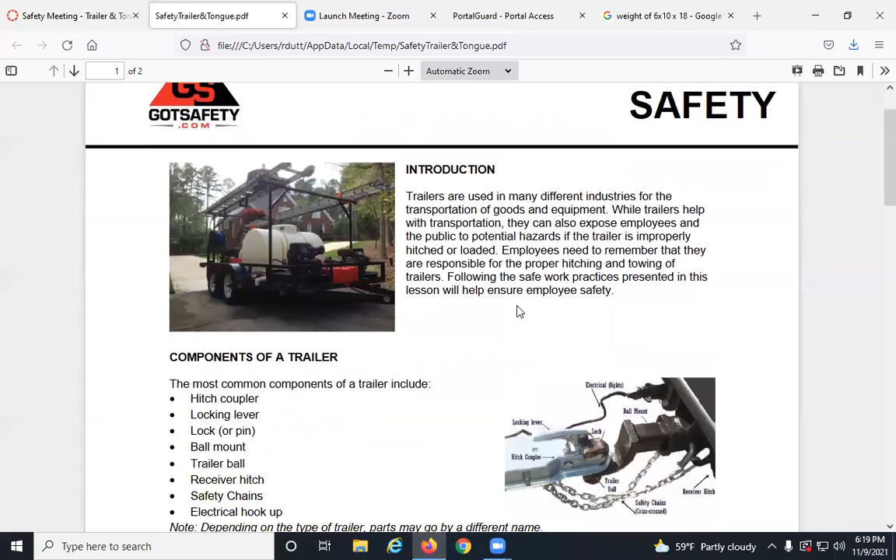Okay, we are not going to read this. It goes through the components of the trailer, plus I'm not projecting it for you guys. Have you started recording? I did, thank you. So I'm not going to project it, so you guys don't get to see it. You'll just need to access it on Canvas if there's a question from here and you want to look for that answer. We're just not going to take the time to do it. It's a good safety meeting because we do use trailers and I actually like it, I just don't want to take the time right now. So it's still sitting there for you.

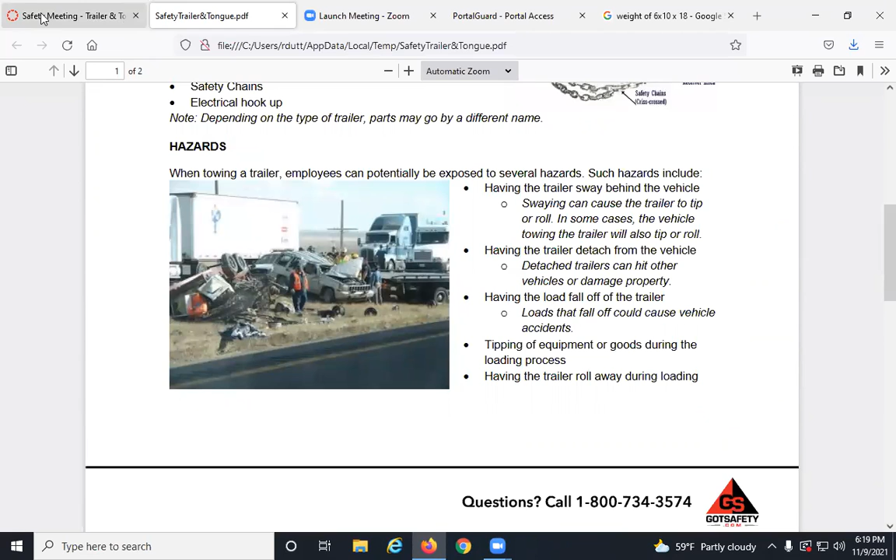But I'm not doing it tonight, bless you.

So week 12, this is week 12. What does that mean? Well, it means 4 more weeks, and then I imagine we'll do the final on the last night. So really 3 classes left. The final's gonna be in week 16 for this class, or week 15?

16, the last class. I know Patrick does his in week 15. Well, I used to do that too, even though the school tells you in no uncertain terms when you need to do your final. We were doing it before so people could come on that last class, get their test back, and we could go over the test. But what happened over the years is that half the class didn't show up for the last class. They did their final, they were done, they didn't feel like they needed to show. I couldn't get them to show, so we started having it on the last day, so people had to show and take the final.

So midterm exam review. Where did I put the exam in here? No, all right, good, it's 100 questions. Yeah, he didn't put this double, so this should be 7 sheets.

6, 7 sheets. There's a bunch of true and false questions. Everything's based on the book, except the stuff we did up at City College, the pour and the forming.

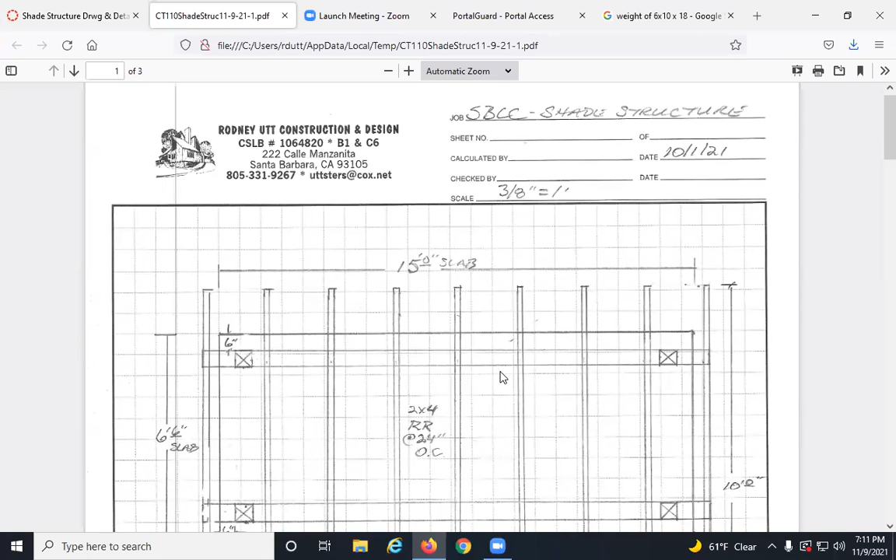Okay, so here's what we've been doing. It hasn't changed a whole lot from my first drawing, but I just want to show you how we're going to change this and all the figuring I did today. Right now this slab is 15 feet, right on 15 feet. The posts are 6 inches in, right? So I show this beam at 6 inches past on both sides, and that's using a 16-foot beam.

We have an 18-foot beam. We're going to square it up, probably take 6, 8 inches off. We'll make them both exactly the same, hang them both over exactly the same. So for instance, let's just say we wind up getting 17.6 - we get both our beams cut to 17.6. They'll still sit exactly where they're sitting. The rafters, the 9 rafters, will still sit right there, because that's going to carry our roof.

Our beam will cantilever a little further. Because right now at 16 feet, it cantilevers a foot past, right? 6 inches and then 6 inches past the slab. That's at 16 feet. If we go 17.6, we're going to be past the slab - we're going to be 16... we're going to be 1.5... we're going to be 9 inches past.

Is that it? No, that's not right. So at 17.6, from 16, that's 1.5 feet. Yeah, so from 16, rather than 6, it'll be 2 feet past. But regardless, all you need to know is that whatever we come up with for those beam dimensions, it will be exactly the same length.

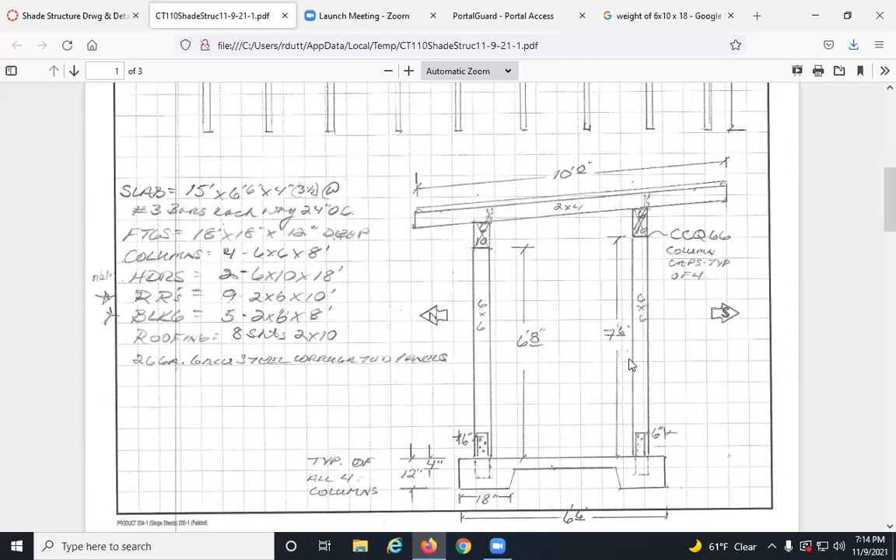So to work out those bird's mouths - at this point I had this going, I changed it once from 6/8 to 7/6, which would be 10 inches of rise, and that 5-footer run would have given me a 2 and 12 pitch. But as it turned out, I decided to do a 2 and 12 pitch using 10 inches.

Well, I was thinking about 6 feet - it's not 6 feet, it's actually 5 feet. It's 5 feet, and 5 feet is basically from here to here. So I called that our run from outside to inside at 5 feet, and we gain 2 and 12. So in a 5-foot run and a 2 and 12 pitch, we're going to rise how many inches?

Yeah, 10. 5 times 2, 10. So it's going to be a 10 inch rise. So ergo, this post will be cut at...

6/8. That's the post. 9.5 inch header set on top of it, making it 7 foot 5.5. This post will be cut at 8 3.5. That should be a line continuing there and a cross hatch. That's 8 3.5, that's the length of the post. And then add 9.5 inches to that, you come up with 7/6.

Right? Is that true? No. What have I done? I screwed something up in that, didn't I? No, that's right. So this post is cut 6/8, this post is cut 7/6. That's what it is, 6/8 for one post, 7/6 for the other.

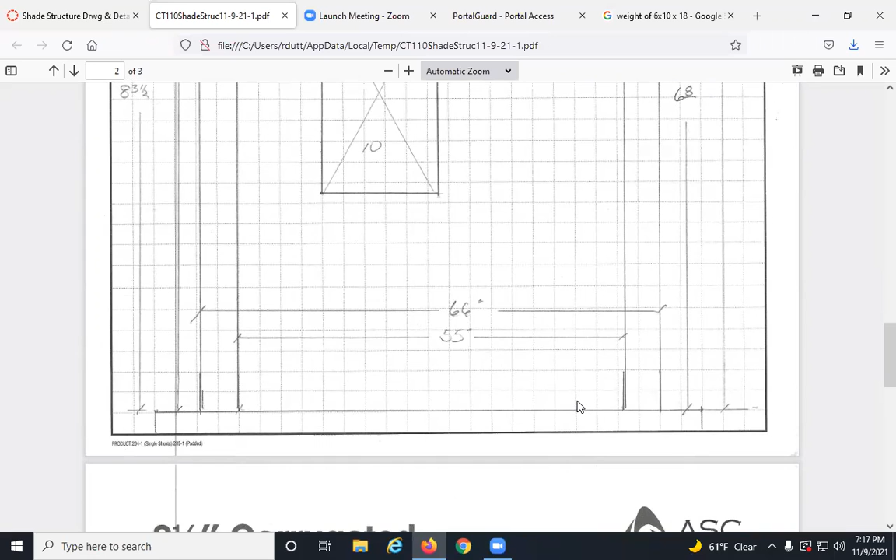I laid this out to scale, pretty big scale, 1 inch scale. That's as big as I could get on that page. Showed the slab, showed exactly where these column bases are based on the measurements I took on the slab, not just my drawing. I went and measured the actual slab. So that's all laid out.

That 66 and 55 are per scale. So I laid it out big enough where I could figure what I wanted for a bird's mouth, which was 1.5 inches down and 8 3/4 over on the flat, should give us the bird's mouth we need.

And this part of our bird's mouth, we'll cut a test piece, 2 of them on a piece of waste stock. Make sure it fits in there like we want it to, nice and makes contact all over it, 1.5 inches down and 8 3/4 across. And our post will be plumb.

And then from there, we'll lay out, we'll cut them all. There's only 9 rafters to be cut on the site, so I'm not too worried about that.

One thing I think I mentioned here, I'm not sure, I mentioned it more than once to more than one person: a 6'6" by 15-foot slab. 4 columns, 6 inches in all the way around, 2 headers, 9 rafters, 8 pieces of roof, 4 column caps, 4 column bases, steel and foam.

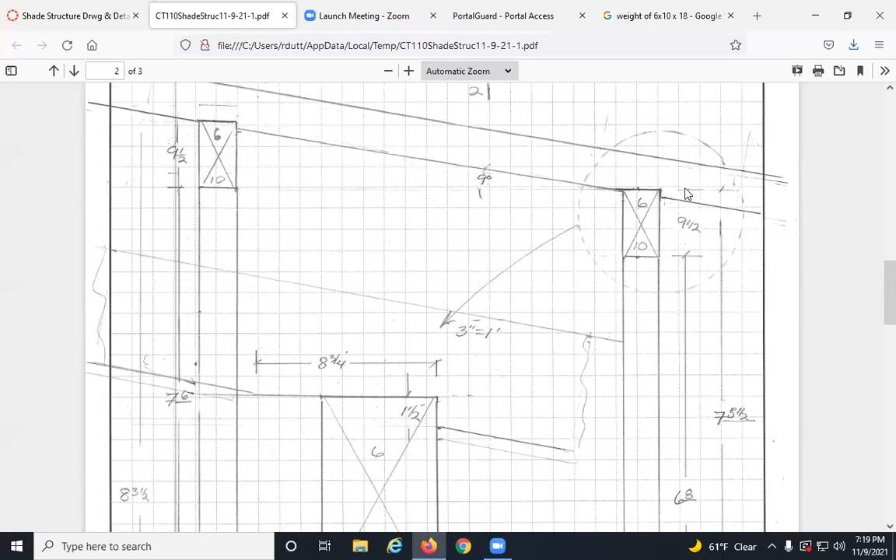And I think the structure will just come out really good and be a blast. I put a fair amount of time and thought and energy into it, and you can see when we're working in a fairly decent sized scale, 1 inch equals a foot, it looks as though that flat part of my level cut of my bird's mouth, it looks like it'll plane pretty good right to the edge of the board. But really, when we blow it up, now that's 3 inches equals a foot.

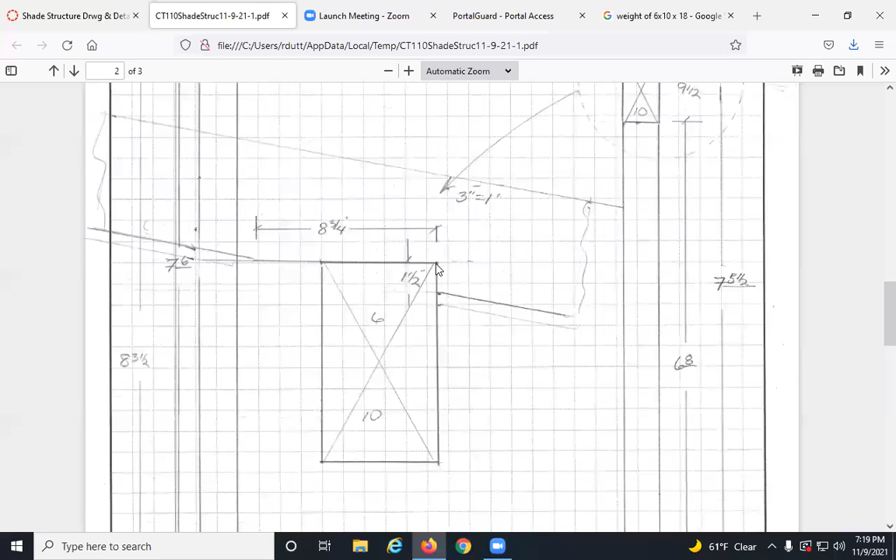I blew this detail up to 3 inches equals a foot. And you can see the 1.5 inches and carrying that guy out, because this is the proper angle. I also measured this with my protractor, it's a 9-degree angle. That's what that creates, a 9-degree angle. And it goes flat for 8 3/4 before it exits the board at that angle.

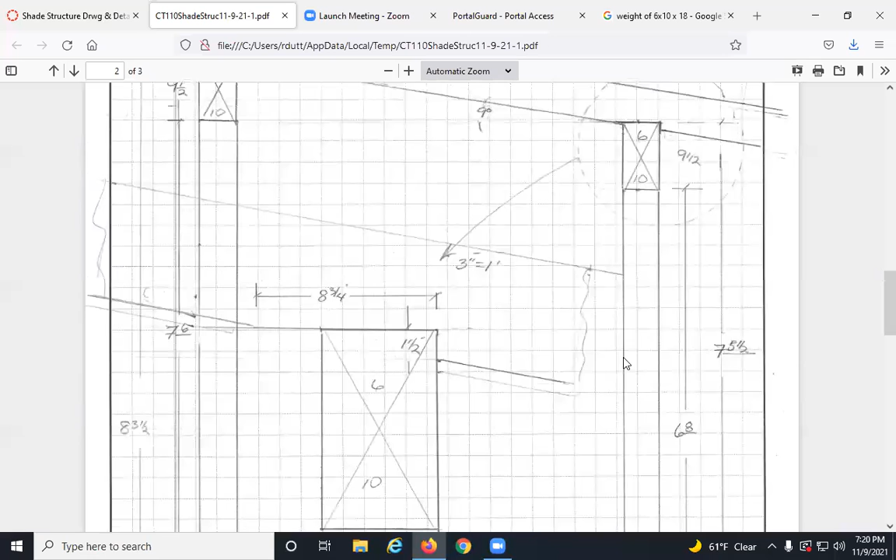So it'd be fun to see that once we get a couple or a test rafter cut, we get the bird's mouth cut just to see how it fits. And I was thinking, out there, we could conceivably, because we know it's 10 inches of rise, right?

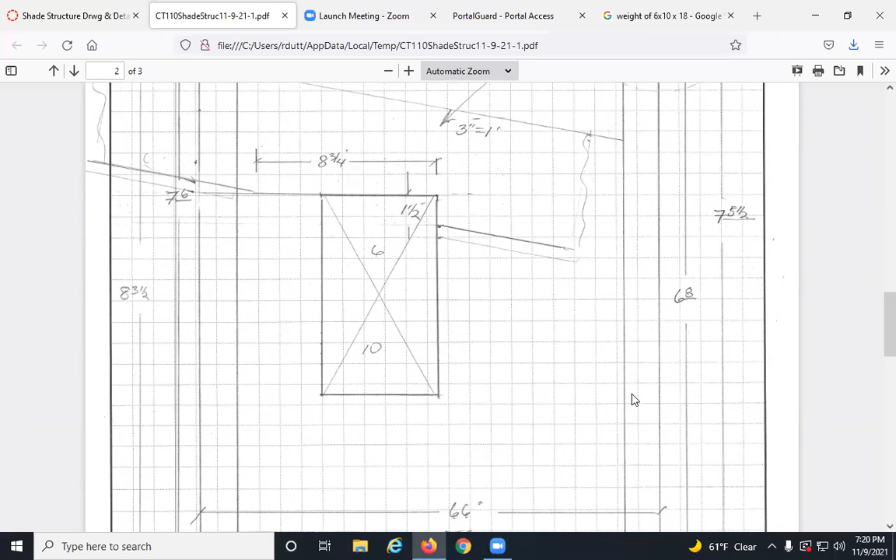We could conceivably cut six 10-foot pieces, lay one down, block one up 10 inches, move it 5 feet apart, and play with it there rather than have it up in the air, just to make sure it works. If I can assure myself that works, we may cut the bird's mouth here. We just haven't decided yet.

This is our roofing. I went over there today and laid out some laps with one lap. So with this guy here, if you can picture that lapping over the next sheet, like if that was the next sheet, it would lap over right to there. Then here to here, trough to trough, is exactly 24 inches.

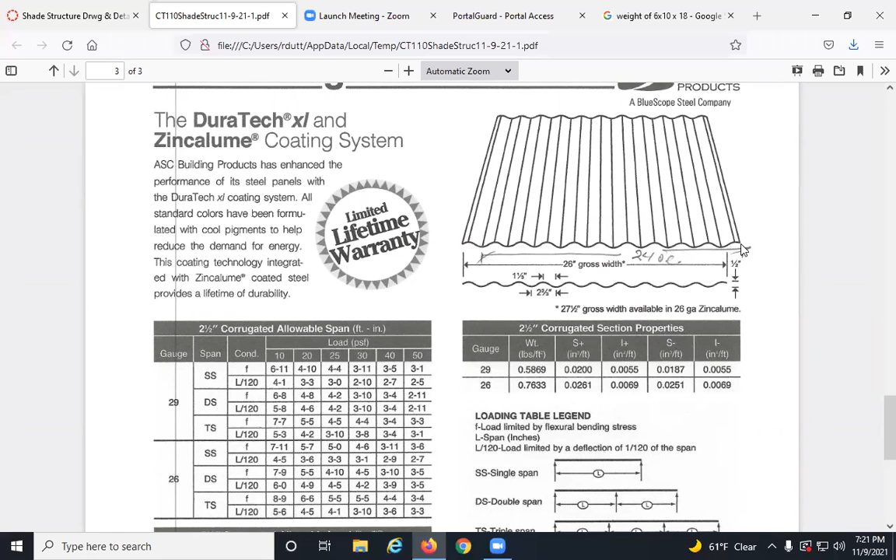So that's how we'll lay out our rafters, dead on 24-inch centers. When we lay them out, we'll actually lay this one out first. We'll lay them all out before we do anything, to make sure it all fits. We'll lay that one out, and then go from the edge of that. We want the roofing to go to the edge, 24 inches to the center of that trough, then go 24 centers. So this will be a little less on the side. That's got to be taken into account too.

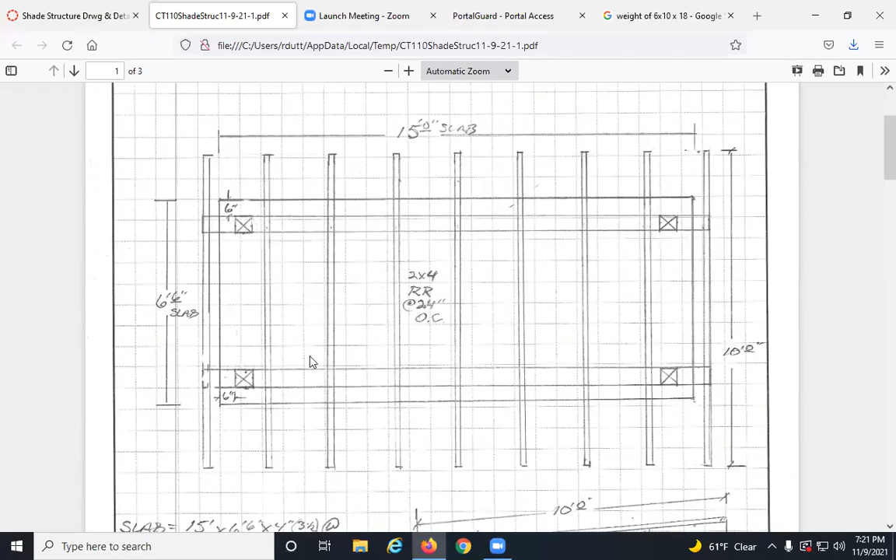Okay, so is everybody ready to go out there and cut? We get to do some cutting, and then maybe we'll do some routing. So what's going to happen, Zoom gang, is that...

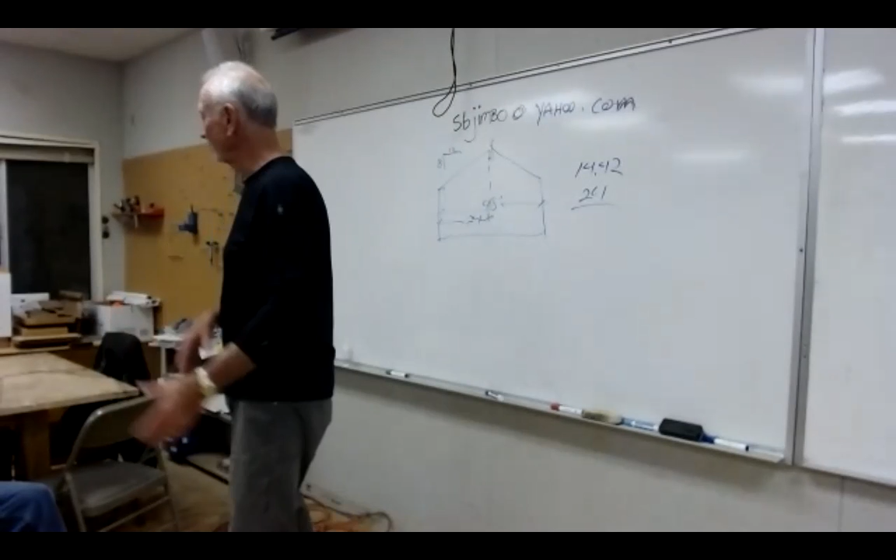I'm just not sure. Part of this is that bringing you all along with me doing this is completely different than if I was just doing it, right? So I've got to rethink everything I do, doing it this way.

I think we're all going to have a good time doing it, and you're going to have something that forever you'll be able to go, hey, let's go see that shade structure, man, we did the slab on this.